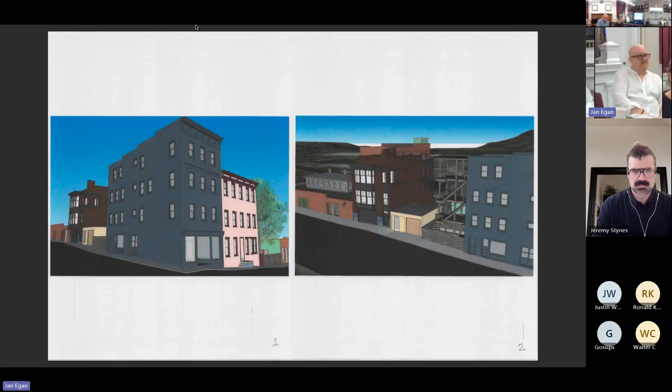Okay, if you could, Jan, Ronald's ready, raising his hand, thank you. If you could start with the site, the urban plan. Okay, let's see, hold one second Chip. Sure. I have a hand raised, Mr. Kopnicki.

I'm sorry, I raised my hand because I intend to speak later. However, what I want to say is if there are people in the room from the neighborhood who want to speak on this, I would defer to them first. I will lower my hand temporarily, but I wanted you to know that I do intend to speak. Jan, I think we should take those comments later, after Chip has made his presentation.

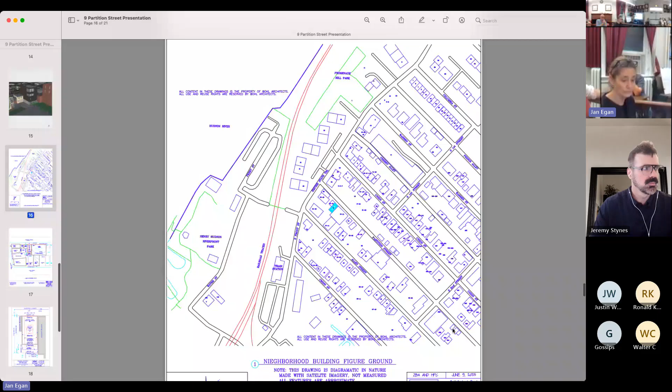Yes, thank you all again for reviewing this application for a new house on Partition Street, at number 9 Partition Street. Thank you for that split screen. This map illustrates the footprint of the lot at 9 Partition relative to the houses and buildings that exist in this immediate neighborhood. This is Warren Street, this is number 11 Warren Street, which we're familiar with. This is the former public school on Partition Street and Allen Street. Just to give you a point of reference, this is Front Street.

This lot is adjacent to a large brick warehouse building, which fronts on Allen Street and is built all the way through Partition Street. Just to give you some orientation to the location of this lot in the city, that's what this building density study is for.

This illustrates in greater detail the site plan. This is Partition Street, Front Street, Allen Street. This is a drawing constructed off of the professional survey that was made of the lot.

In red, we see the outline of the existing building to be removed, which is a 1-story garage off of Partition Street. Adjacent to it is 10 Allen Street, which is actually the number 8 and number 14 lots on Allen Street. This is a 4-story building, nearly 50 feet high off of Allen Street. This is the 1-story building off of Partition Street, which is brick.

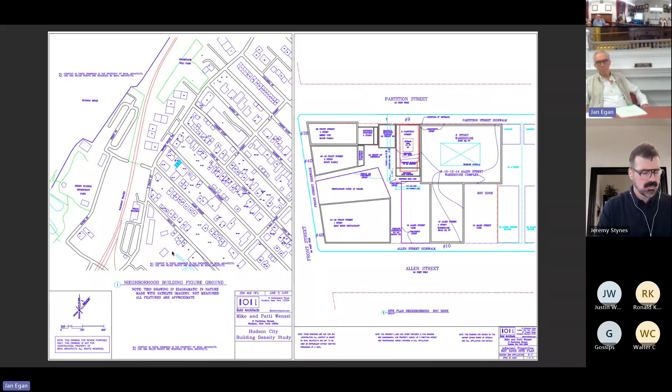This building is on a T-shaped lot. It has a garage here and a private driveway to Allen Street on this side. So this property, which fronts onto Front Street, comes through and owns this alley and the adjacent garage. This is the Half Moon and its patio.

You could advance to the next.

This is a larger detail of the site plan. In red dashed line is actually the property line, and the adjacent property lines on Partition Street. This is the offset that is in that alleyway of the adjacent property. This red dotted line is the existing garage to be removed.

This building, the proposed building, has a footprint which comes with the side yard. Side property line here, the side property line here. We're providing a 5-foot deep rear yard with open porches that extend for the full height of the building.

The rear wall of the building is here. The rear wall of the existing building is here. The front wall of the existing building is 9 inches off of the side of the Partition Street property line.

Just to briefly follow up on the Zoning Board of Appeals approval which we received, this simply indicates the zoning requirement for the setback of 15 feet from the front, 30 and 7.5 feet on each side. We received approval to build in this footprint. We received relief on the rear yard and the 2 side yards.

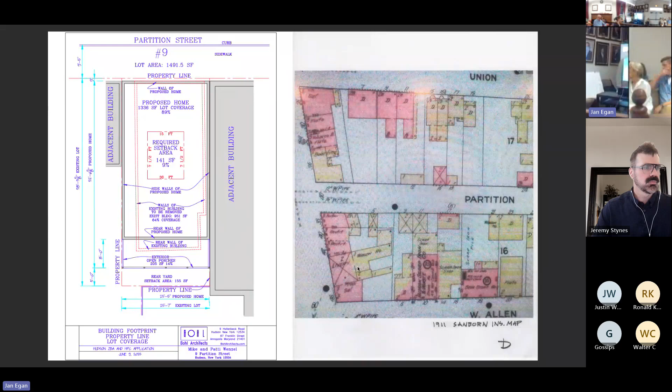This is a scrapyard, iron scrapyard, a livery, and so forth. The reason it's a more intense zoning today is because at one time it was more part of the rest of the industrial area that was all along Front Street and extending down to the train station and so forth.

This is... go back. Yeah, actually I'd like to go to the map quickly.

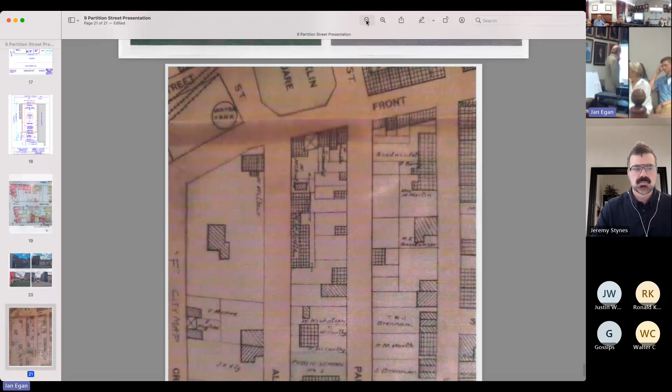This is an interesting map because it's a city map of lot ownership. It illustrates how many of the lots between Partition and Allen and between Partition and Union had been subdivided at one time. Some lots faced Partition and didn't extend all the way through from Allen to Partition or from Partition to Union Street. It's curious that in this zone there was some division of these lots for buildings that faced exclusively these streets and Partition Street.

The other thing that's interesting about this, there's been discussion about Partition Street and its role as an alley compared to the other alleys. Partition Street is 40 feet wide, property line to property line. Allen Street and Union Street are 50 feet wide, just another 10 feet. Front Street is 65 feet wide. The alleys, Prison and Church, Cherry, are 20 feet wide.

So Partition is a unique street. It is in fact a street. Some historians have made the statement that it's one of the oldest streets laid out in the city. These photographs simply show the existing condition.

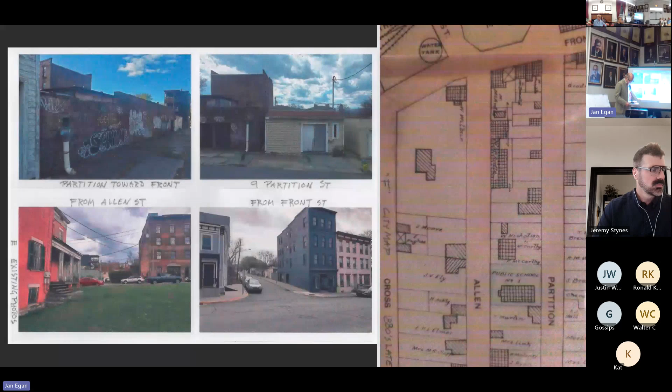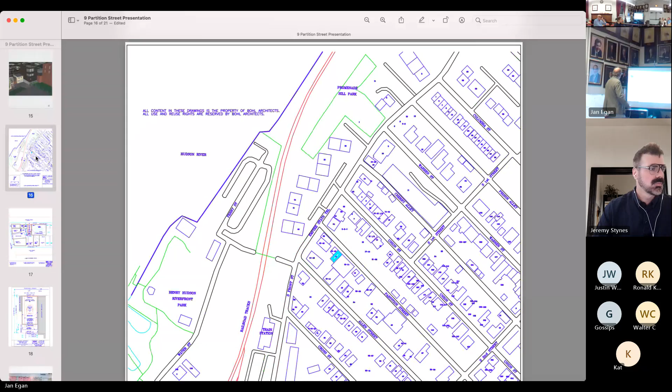We could go to the... what's next on our... could we go to... do we have the architectural drawings in this set? I don't believe so. Okay, then I'll just quickly... let me see if I can. I have the architectural images. Is that what you'd like to see? I have A through F. No, I'm sorry, I'm looking for the architectural drawings. They may not be included in that package.

Okay, these are the architectural drawings that have been submitted for the building permit. We've reviewed this with the code enforcement officer. Full architectural plans are part of the package here, including the garage plan, the first and second floor plans, the roof plan, window schedule, and the building elevations. This is an interesting drawing.

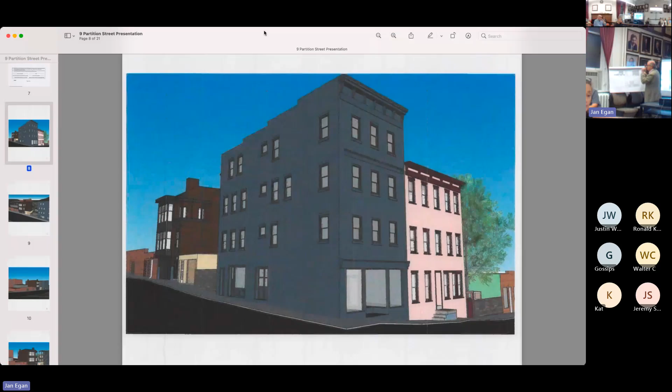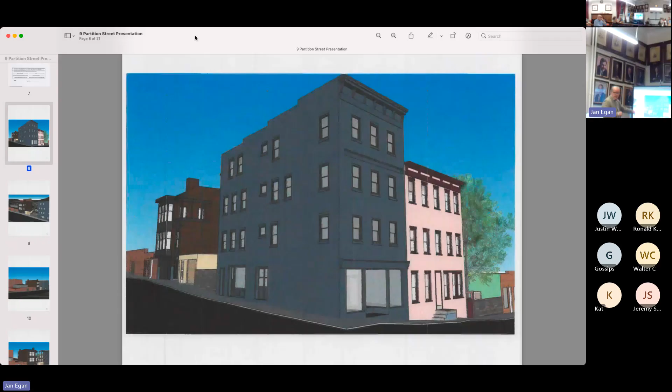We could now go to the images. This is the perspective, viewed from the corner of Front Street and Partition. This is the existing TKG building, which is four stories high, multi-use, office and residential.

This is multifamily, with the Half Moon beyond. This is the small garage and brick building beyond on Allen Street.

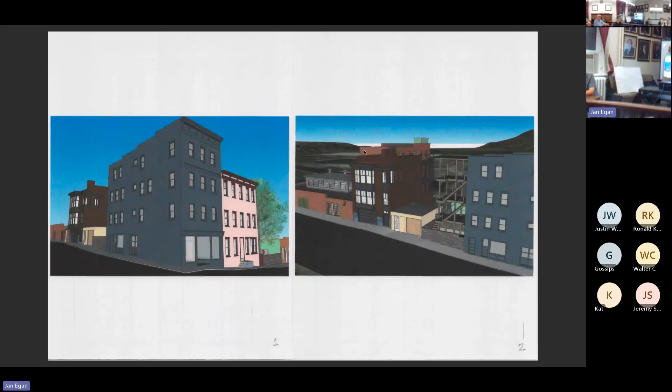This is the proposed building, which we see as we come around and turn around, with Allen Street in the background.

The porches in the back of the TKG building, and this is the brick building that is the back of the warehouse building.

The proposed building includes a garage for parking space, an obvious front door at the street, and centered above the front door are windows on the second floor, with a porch at the third floor level.

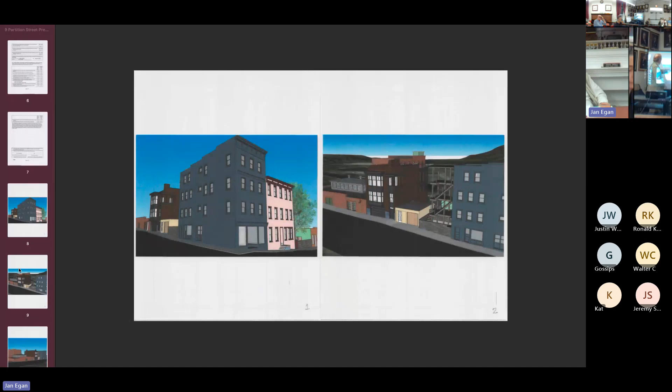At the rear, this footprint, which we looked at previously, the simple footprint of the building is eroded away as it goes up the building, on both this northwest corner...

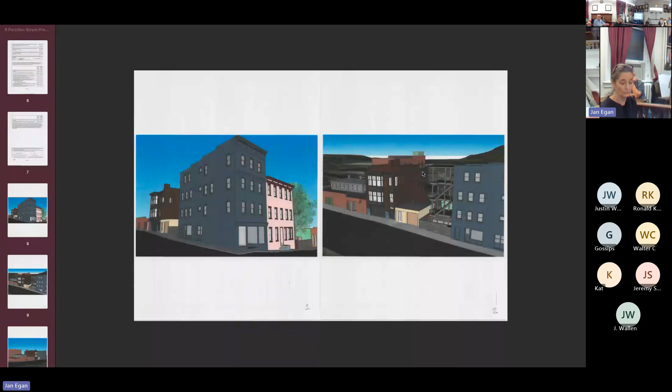...and also the west, south, and east of the rear. So these porches provide some relief from just a simple rectangular box that gets extruded up out of the property line. Next, please.

This is a closer detail of that image we were just looking at. These drawings, by the way, are constructed from measured drawings of the TKG building and measured drawings of the warehouse building.

They are digitally accurate, so the proportions of these spaces and the proportions of this building are accurate and measured. They're not approximations. They're accurate.

This— oh, I'm sorry. That's okay.

The number 9 is painted on the transom above the door—again, another feature familiar to Hudson.

The overall architectural concept here is that this building has a design which transitions from the fine homes of Warren Street and Union Street and Upper Allen Street as it transitions down to the industrial area around the train station and beyond.

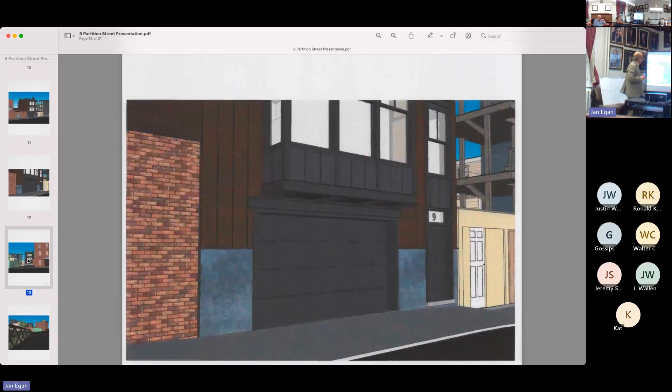...and the industrial aspect of the adjacent building that is on Allen Street. This is as viewed from Allen Street.

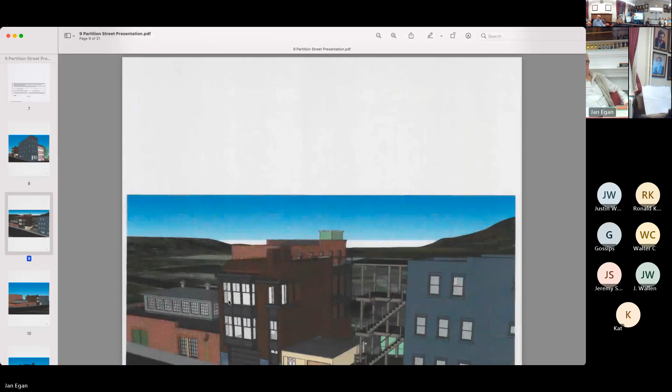The two items that were requested at the last meeting for an additional image - I only have three copies of this. This first image, page 2, is a building directly behind us.

It was asked at the last meeting that we bring an image of the steel siding material. This is the building in black. It's actually very nicely tailored. It was recently done, approved by this commission. It's right behind us on the alley. This siding is exactly the same material, that is correct.

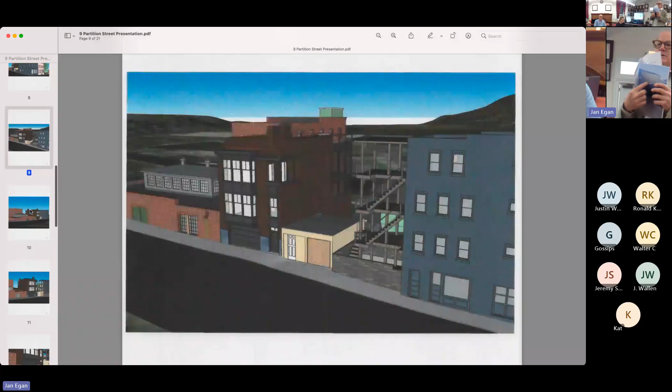The spacing of the ribs we would like to reduce from this width. These ribs are about 18 inches. We have this drawn right now at about 12 inches, so a little bit thinner, not quite as boxy and as heavy as this.

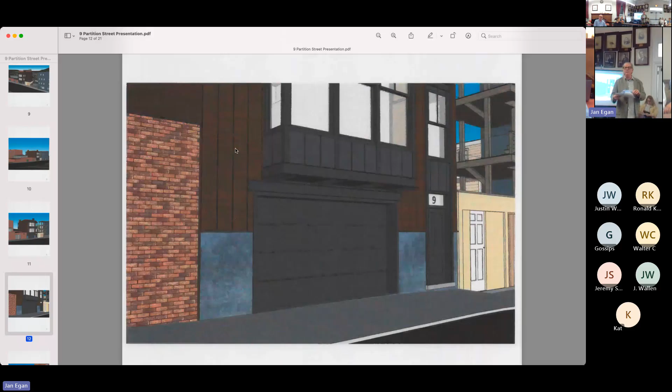It's an accessory dwelling. I don't really remember, it's on this facade facing Prison Alley, right behind us. So I thought this was a very good immediate example of the design intent that we have here. It's 522.

I brought at the last meeting, and still have if you'd like to see them, the brown color sample and the black color sample for the metal.

It was also asked at the last meeting that we specify the windows. We have familiarity with Marvin Ultimate Windows, which is an aluminum clad exterior window with a wood frame interior. We also have Marvin Modern, which is fiberglass, both inside and out. It's black and has a much thinner profile, which is more desirable for us.

We have two other manufacturers of all metal windows. One is all aluminum and one is all steel. The Weather Shield is an all aluminum product, aluminum outside and inside. It has a thermal break and performs to the requirements of the energy code. And then we also have Quantum Steel, another window manufacturer that makes exclusively steel.

There are several other window manufacturers of steel. Are you proposing all 4? I'm proposing that we have an approval for a type of window, not a specific manufacturer.

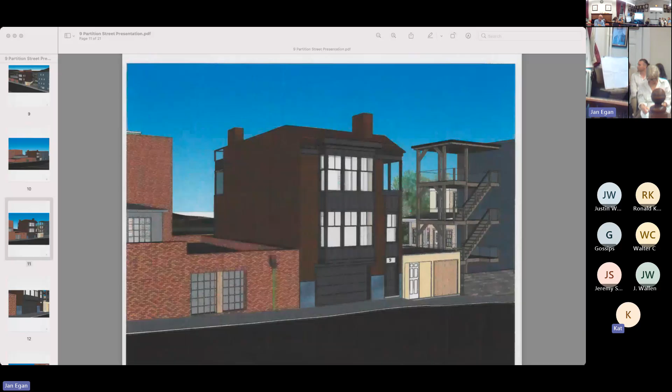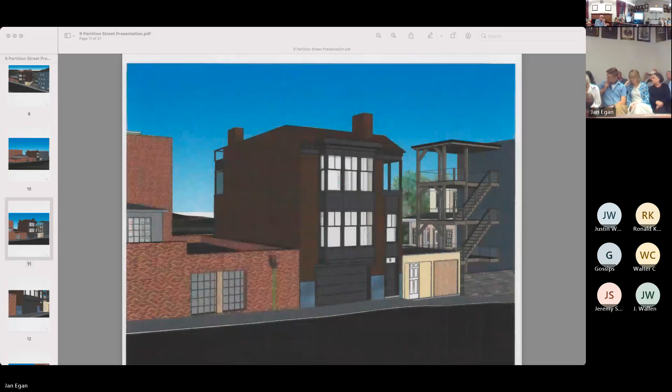So everything is 2.5 stories or lower. That half story you're saying is bad language, it's significant in the mass, light and view blockage and everything else happening on Partition. So it's not a bad term for it. 2.5 stories is a big difference from 3, and it makes that big, large volume blocking space on Partition that's not appropriate for the consistency of the entire street.

So looking at that 3-story building as it's designed adjacent to the TKG building, and the TKG building faces Front Street, I understand that. We don't need to extend all the way on Partition just because of the TKG street building. I get that, but in the context of this zone, the 35-foot height, and the fact that if this were a multifamily building, it could be built to 45 feet, just as the TKG building is.

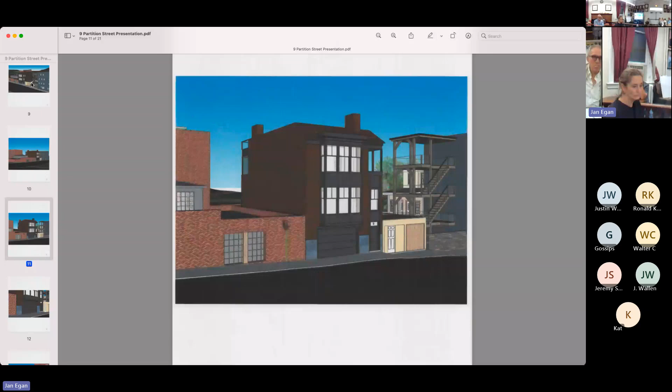The warehouse building on Allen Street - not actually, I beg your pardon - it's not, it exceeds 45 feet. It's 49 feet.

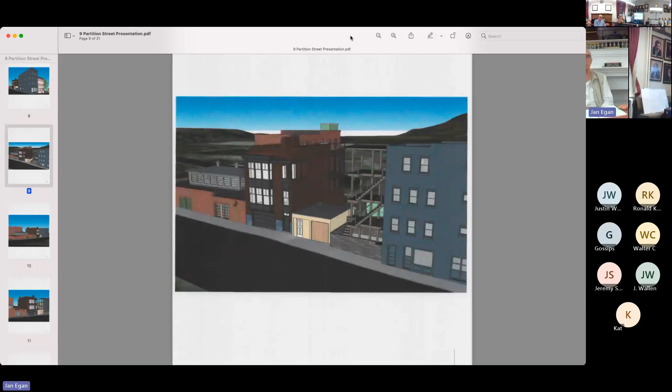So yes, I get that you're fine tuning the use of single-family dwelling versus building mass and building volume. I get that. But in this case, the specifics of this location and the specifics of the context in which this building exists...

It is perfectly appropriate to have a 35-foot high building here. I'm not disputing 35 feet high, but I am disputing the extra variance that you glossed over, having another half-story relief from zoning. Well, please, the overall volume is too big for the space. Anything 2.5 stories, we've solved that.

That's, I realize. Well, it should go to the board, not to me. They shouldn't have. Thank you.

We have to just, I want to hear from the public, and then we'll go to the board. I think the point is that the comments can be made, they're made to the board. It's not really intended to be a dialogue. So while that's helpful, however, our attorney reminds us that that's the nature of the public hearing.

Other folks, speak out. I just wanted to say, I only have one copy. These are the only other single-family homes on Partition with addresses between First and Front, and you can see their scale. I also sent this to you with my letter. I live at 11 Union, directly across the alley.

Could you identify yourself? My name's Alexandria Darrow. I just wanted to have this, people can take a look. This is Stan and I live at 11 Union. I'm not an architect, so these are not CAD professional, but I did my best to do the scale of what we'll be dealing with outside of our house.

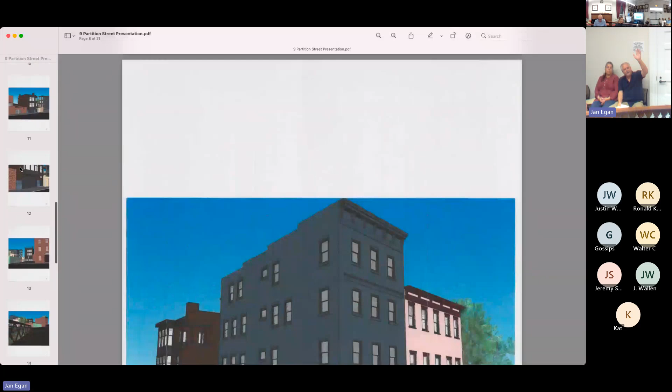And I feel the same way if you look at 10 Allen. I mean, that's a warehouse that was probably built when the South Bay was still there and people were bringing things into it. And now, I mean, it's a beautiful building. Light reflects off of it. The birds all live on it, and it's there. It's a lot of work, but it doesn't look anything at all like what he's talking about building.

And it's not a residence. Either one of these are residences. They're both commercial buildings and multifamily buildings. This is a single family dwelling. So I don't see how those 2 buildings really have that much to do with it.

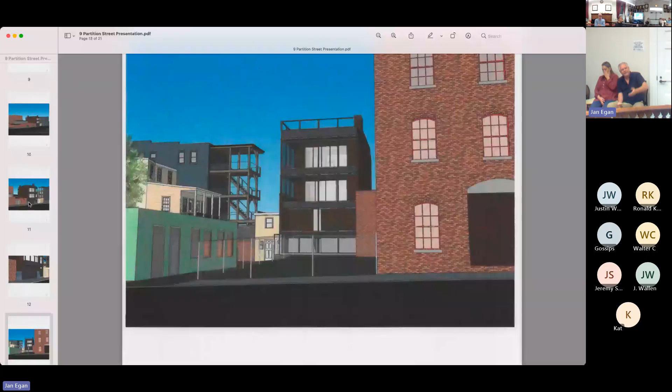And as you go down Partition, there are only, from front to court, only 2 residences listed in the records that I took from the Union Allen South Front Historical District application that formed - when it was formed, it lists every building in there - and there are only 2 buildings listed as residential buildings, and that's 2527 and 219, 221. Both of those are 2-bedroom or 2-story buildings, built a long time ago. One looks like nobody even lived there, so I'm not sure if they do.

He brought up the other day that the partition is 40 feet wide. I don't know where he measured it from. If I measured from my property line to the curb in front of 9 Union, it's 23 feet, so I don't know where the 40 comes from. And it's got a 9-foot sidewalk over there. On that street there are always cars parked on the north side, because we have no alternate side parking since the street's like an alley. So there's another 7 feet that comes out, making that a really narrow street as it is. But it's not 40 feet wide, that's for sure.

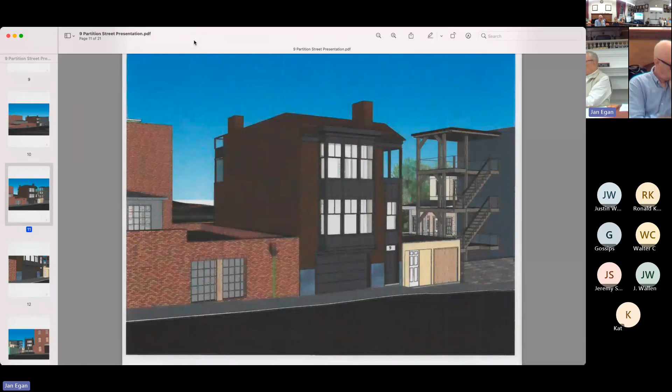Hi, Margaret. Yeah, Margaret Morris, First Ward resident, also council member.

Basically, outdoor rooftop space from a privacy perspective, I think that will create a problem for the residents that this house overlooks. I myself live next door to Spark, which has a rooftop, and I didn't appreciate until it opened how much of a privacy issue that was going to be for my yard, my home, and my bedroom. So please give careful thought. There was no height or zoning waiver required; the project was reduced in scale and size for that. However, that rooftop piece, I think, will have a negative impact on the residents that are over by this building.

Thank you. Someone else in the back? Me? Yes. Hi, Ivy Dane, 15 Union Street.

One thing I wanted to point out straight up was, we appreciate you guys preserving the historic nature. You recently made a decision on 105 Union, halfway up the block from 9 Partition Street. If I can quote John, or Jules, on the integrity of our historic district, massive and inappropriate to the surrounding area — this is a perfect example of that. You guys also approved the Mark McDonald House, a totally different situation. Can't wait to go see it tonight. Different part of the neighborhood, different situation entirely — owner, architect, everything about it. Chip described this himself just now as a rectangular box.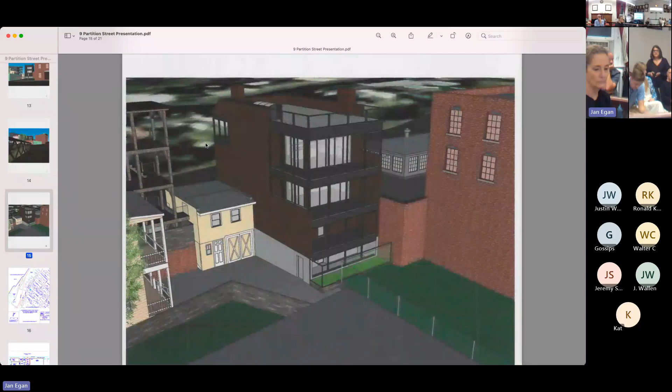You guys can see that also in my letter, sorry, I keep speaking. Yeah, what else can I tell you? Oh, environmental.

There's a wind tunnel that exists off the river, I believe. You guys can see it in my letter. There have been two giant trees that have lost humongous limbs that have come down. One right across from 9 Partition Street came down to 2 Partition, took down the power line and destroyed property. One that came formerly from 11 Union cut across two yards. Between 11 and 15 there's a space, a side yard, that looking at this house doesn't indicate.

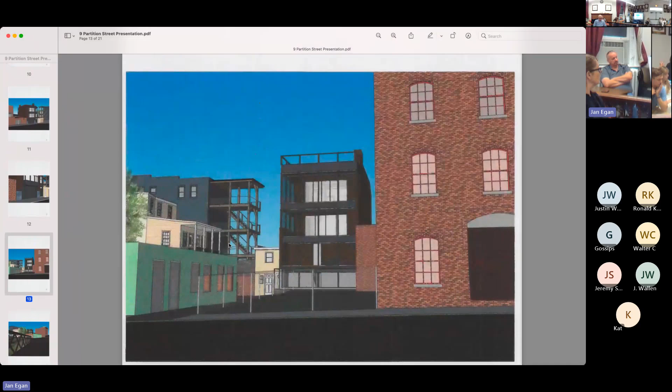I believe this building should be referred to as a garage. I don't know how you could get a car through that pedestrian door that's in that building right now. And the wind tunnel is only gonna get worse. There's already a tiny little garage between these two buildings, and it's only gonna make it worse.

Thank you. Anyone else? Go ahead. Hi, I'm Nicole Vidor, 39 Allen Street.

This is the first I've learned that I'm gonna walk down Allen Street and see a chain link fence. I don't understand that. That's appalling to me. I don't understand why there's any connection between industrial and residential. This is a residential building, not an industrial building. So there's no need to copy industrial.

And I think it's really extraordinary, honestly, that people who come into Hudson have zero regard for their neighbors or the community. I find it extraordinary.

Thank you. Who's got their hand up? Mike? Yes, how you doing? I'm Michael Wenzel. I built property on, when people say come into this neighborhood, I've been around here for a long time.

Built a house on 34 South Front Street, I redid it. It was a knockdown, I made it beautiful. Since I've grown that house, I'm trying to make another beautiful project.

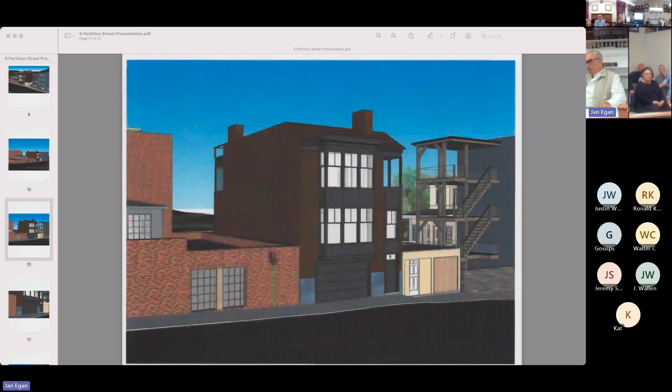The city is currently undergoing a massive democratically led change in how it thinks about public space and how it thinks about organizing itself. I'm sorry, can you just identify yourself? I actually don't legally have to, but thank you for asking, and I politely decline to refer to me as the friendly neighborhood immigrant.

I own property in the first ward, and I really respect how you do your work. My concern, to go back to my point, is the town is in flux. When you see this many residents show up disrespectfully for a landowner, one of the largest property taxpayers in town, I'm deeply concerned at how things are rushed.

I'm not saying you are rushed necessarily, but across the town. And I think, given the public response here, I would rather we extend the process, have some of the very fair questions that were raised today answered in writing, specifically, declaratively, and then make a decision.

Because I've only been in this town for a couple of years, not as long as many of you, and hopefully you sir, but I see a lot of unhappy taxpayers. And my last point is that if you actually look at the tax rolls, which I have done, the first ward carries a very heavy burden.

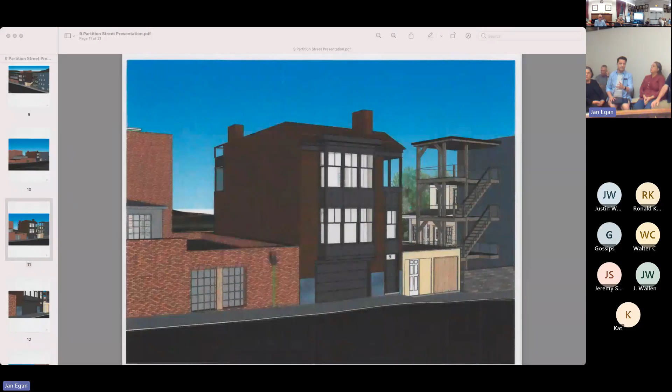For this to happen in the heart of the most historic part of the first ward, I live on Union Street, where I'm also making significant historic investments. I'm deeply concerned. So if we cannot come to an agreement today, which it seems we cannot, I would rather we have, I don't know your process, but in my legal realm, you get very clear declarative responses in writing, and then a back and forth response, and then you make a decision. I would like to request that with any other process.

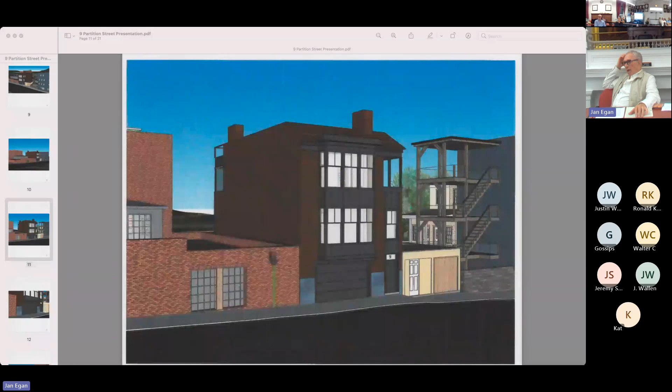Let me comment on the process. I don't think we're either too quick or too slow. We really try to be a deliberative process. We really do try to listen to public views. We also try to respect the owner and the fact that they're putting their money and their heart into a project, and it deserves a certain amount of deference. I doubt that we're going to vote today in terms of process. There's still a lot of input to absorb.

We know Chip, of course, we work together. I happen to know Mike.

They're trying to do something beautiful, but the responsibility is on this board to determine whether it is also appropriate. Everything is predicated on the idea that there is a public interest in what gets built up or torn down, and we're part of moving that public interest in the dialogue. I just want to be sure, and the letters were good about this, that we also continue to be respectful of Mike and Chip for their thinking, their money, their effort on this, and figure out a way forward. That's what we do. We solve problems.

Absolutely. Just let's take a response. You guys do a fantastic job. If you guys could run the city, that would be my preferred outcome.

Just to be clear, I'm not saying your process is bad. I'm just saying, for example, on the technical matter of Nicole's question, residential, commercial, I do not know - I am not from here - if there's some law or if it's a subjective question, whether the commercial aesthetic buildings in the area can be used as a precedent for a residential building. That is really interesting in your question. I do not know the answer. I would love if someone can explain that to me.

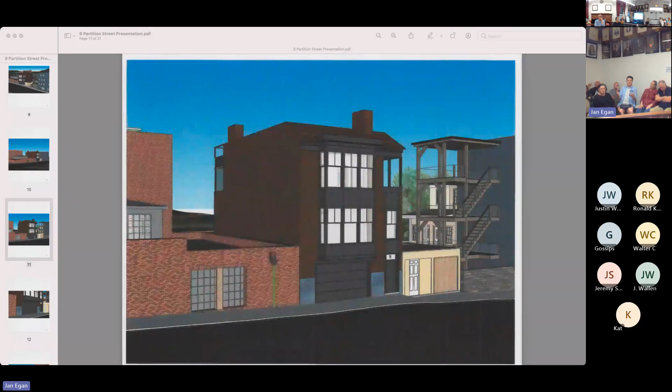And if we need that, actually, I could explain that. Great, I'll give it back to the chair, but that's my question. And thank you so much, you guys are fantastic.

Okay, so what I have - I'll speak for myself, and the board may disagree - I have a lot of problems with this pure notion of precedent. I don't think it works very well in terms of our process. Every block is different, neighborhoods are different, and buildings are different, so we try not to be bound. Chip knows technically what commercial and residential means. I'm not sure that's what we need to focus on. What's the fit with the neighborhood, the buildings around it? Is it appropriate? That's what we do.

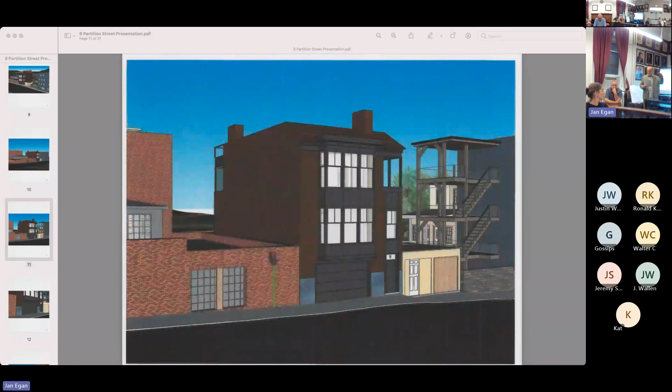I'd like to quickly respond to a couple things that will be helpful. First, the issue of the 2.5-story versus 3-story - that was discussed at the zoning board of appeals, building official. I did not gloss over that as was represented in the zoning board of appeals. The variance was provided between 2.5 stories and 3 stories. The height at 35 feet was not requested to have any relief for that. So the issue of the 2.5-story versus 3-story was attended to by the zoning board of appeals, and a full 3 stories was granted.

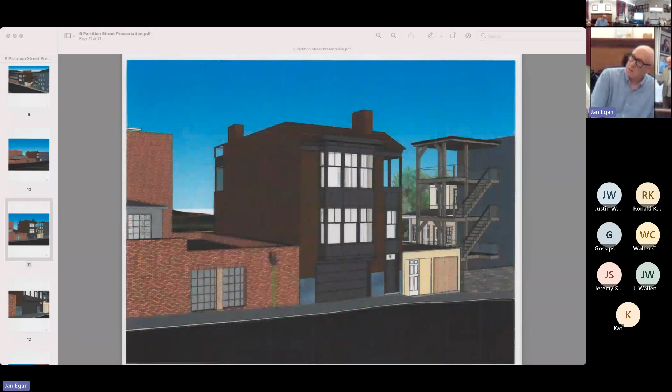The other question regarding the width of Partition Street and not knowing where I got that information - I got it from the 1911 Sanborn map, which is included in your package. Partition Street is 40 feet wide. I did misspeak about Front Street - I think I may have said it's 65 feet, it's actually 60 feet. That is in the package, but Partition Street is 40 feet wide.

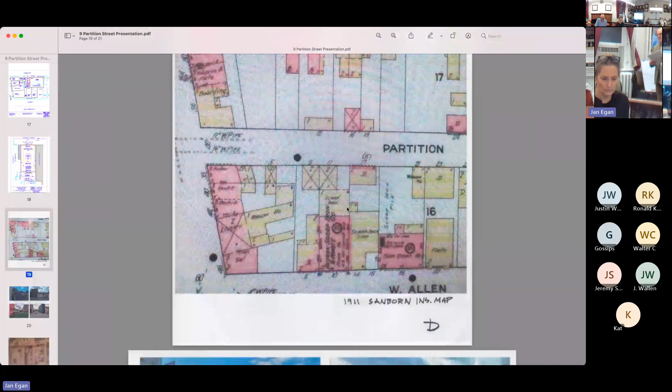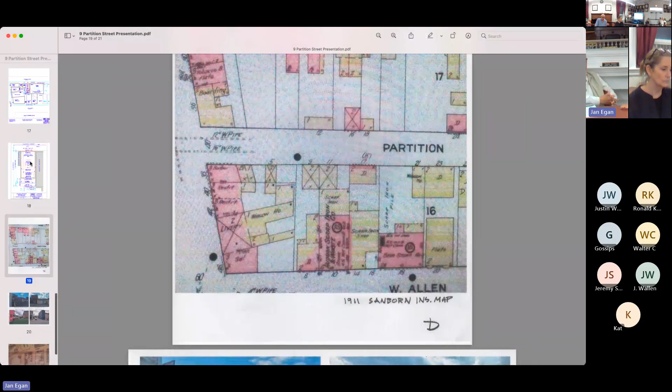Thanks, Jim. Also, the issue of the privacy intrusion into the neighborhood of an upper story, third story, second story porch overlooking yards - that's a real thing, I get that 100%. However, this neighborhood, and in fact Hudson, is filled with 2-story, 3-story porches that overlook backyards. Backyards are not completely private sanctuaries that eliminate neighbors - we share our yards.

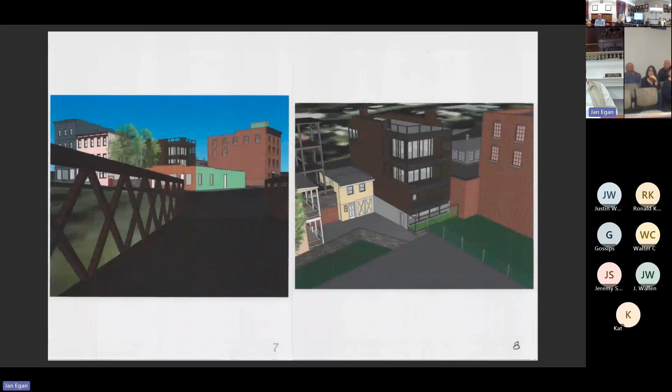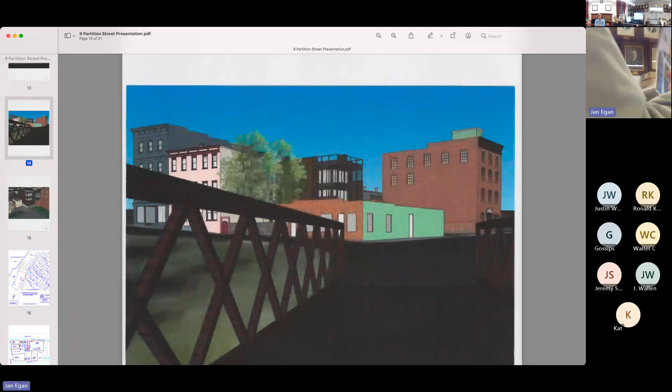So I certainly understand and appreciate the concern about the privacy of a 3rd floor roof deck. However, this particular area has a substantial number of outside covered rooms, if you will - porches that view over adjacent properties. I don't think that...

Mr. Jeffs, we're not going to solve every problem at this public stage. There'll be further discussion later in the meeting. What I'm trying to do is make sure that the folks who haven't spoken get a chance, but without overkill, so we're good. Okay, thank you.

My name's Owen, I live on Union Street.

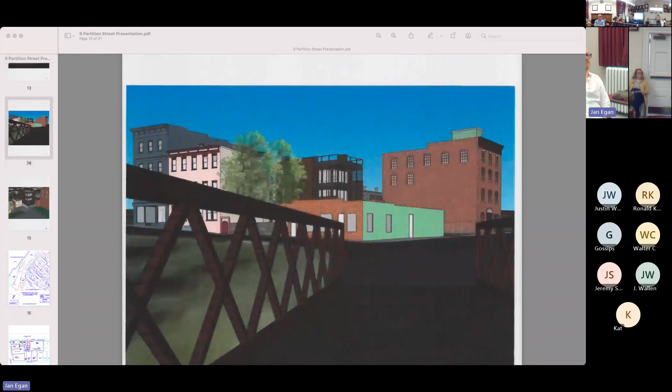I just want to say, just because the zoning board gave relief to something doesn't mean it's appropriate for historic. Just to make that clear from my point of view. The other thing I want to highlight is there are at least 7 houses that will have significant view shed and light impact. They're homeowners who've invested in the front and back of their house, many of them coming before you for various things. They've invested in their landscaping along Partition. Their displeasure with this should matter.

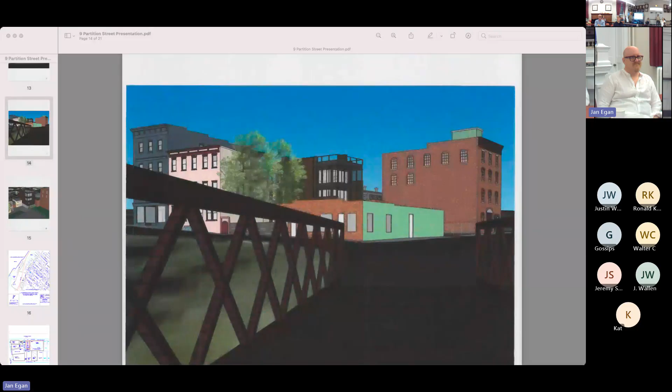That's 7 taxpayers in a row at least along Union Street. I'm sure one of them may have written letters. There's nothing in our process that proposes these concerns don't matter. I understand, I just wanted to highlight them. There's seven houses in a row with significant impact from this. Chairman, thank you.

Someone online who would like to speak? Mr. Kopnicki? Yes. Mr. McGee? Yes, thank you, I'll try to be brief.

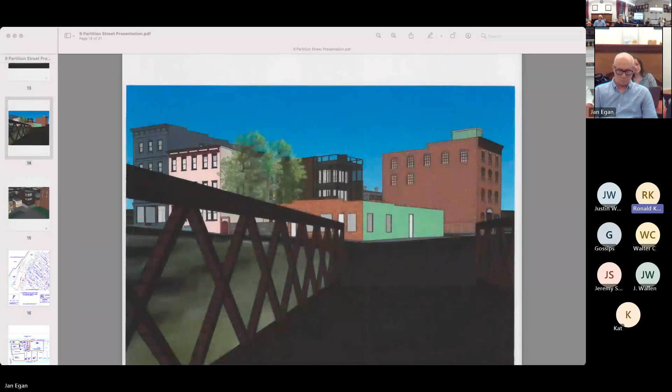I want to comment on the technique of using references or allusions or nods to other buildings or details on other buildings in justification of a particular project. Here, the bay window or oriel is supposed to refer to the finer architecture on Warren Street. Gossips of Rivertown has pointed out that where those features are found, they are mostly found on Warren Street, not on Union or Allen, in the more immediate neighborhood of this building.

Then we have the reference in the materials and the metal cladding to the former industrial waterfront of Hudson. I think if one is concerned with preserving vestiges or traces of the former industrial waterfront, one should be concerned with prioritizing the preservation of what may survive there, rather than intruding what I consider a rather token reference into new construction.

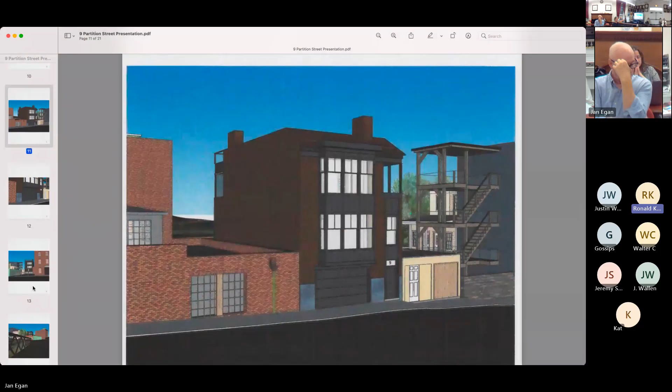At the last meeting on June 13th, I believe Mr. Bowl mentioned the idiosyncratic aspects of this building. I think when it is finally built and we're out of the verbal realm and into the realm of actual materials and massing,

these idiosyncratic impacts will come to the fore, and what the observer coming down the street will be struck by will be those impacts, which are not those which supposedly transition from the finer structures to the formerly industrial waterfront, but which make this building actually idiosyncratic and discordant in its immediate context. It will stand not as an example of transition, but rather as an example of what used to be called the principle of contrast, in which the point was to make the building as distinctive as possible from its immediate surroundings, and in my opinion, excessively discordant and therefore inappropriate.

Thank you. And now Matt will speak.

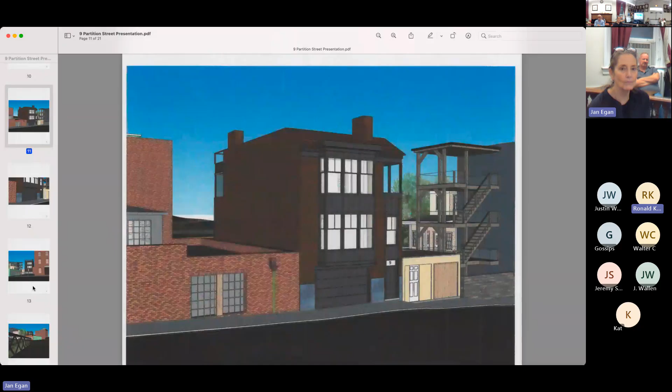Mr. McGee, you guys need to figure out your microphone, we can't hear you. Can you hear me at all now? Yes, could you please speak up? Yeah, did you hear what I had to say? Yes. Okay, my microphone's not muted, so Matt will try now.

Yes, this is Matt McGee. I live on, can you hear me now? Yeah. I live on a 26-foot wide property, and the house does not go from side to side. This is a typical arrangement in Hudson on streets like Allen, Union, and other streets that are not primary, like Warren.

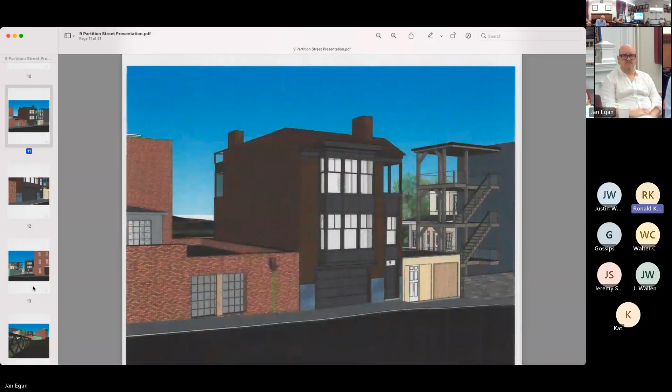The other thing is that presently the building that is there does not touch the warehouse building next door. And there's probably a good reason for that, because I don't think it would be a good place to try to put the two buildings right together. So I don't see how it's going to be sealed up at the side. And I also think it looks better where you can see some of the side wall.

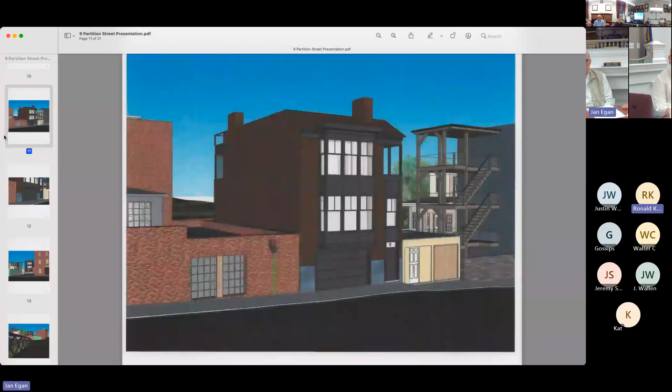This industrial building, which is being spoken of quite a bit, is the only industrial building on Partition. I think it should not be encroached on and possibly built up against in a way that would cause it to have damage. I think it's a very special looking building itself, and I think it should be more respected. There is a distance between the two now, and I think it should be preserved. And I think that any openings between buildings would make it more uniform and compatible with the city. Thank you.

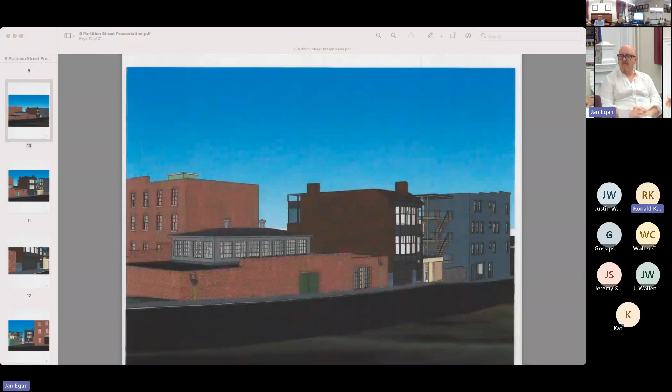Lloyd Olden Getting, third ward resident: This does not impact me personally, other than the well-being and happiness of the community. I am the Republican nominee for the upcoming mayoral election, as well as the Harmony Party nominee, and I am very respectful of this process.

It's dear to me because my mom was so into historic preservation, though I don't know the right word for it. She actually moved an 1850s Methodist church up in Conesville, a few miles, and rebuilt it there. Anyway, respectful of the process, and very pleased with the public reaction, hoping future endeavors comport themselves in such a grand manner.

Just for clarity, to help future applicants with the process: there have been a number of different points brought up. Would each be bullet-pointed and addressed individually, or is it more of an all-or-nothing approach?

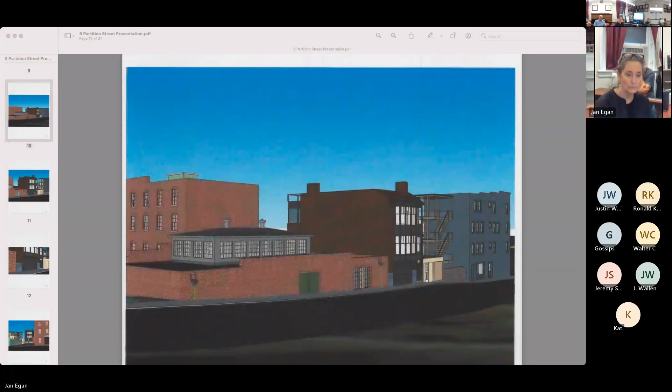No, the project ends up being evaluated at a fair level of specificity. The things that have been raised, to the degree we're able, will be addressed when we come up with a solution and discussed, so it's well established and known. There will be opportunity to talk about scale, fit and finish, materials, details, etcetera - it's not just 'there it is.' I think we'll get to an appropriate level of detail.

Again, so appreciative of the process and the way it's being conducted. Thank you very much - this has been an hour and a bit.

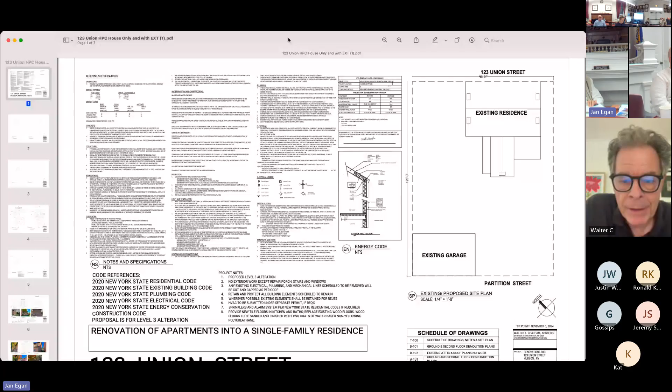Is this the right one? That's the old application - do you have the new application by any chance? I had two files, is it the other file? It's the other file, I apologize. I could probably do it with this if we want to try. Okay, great.

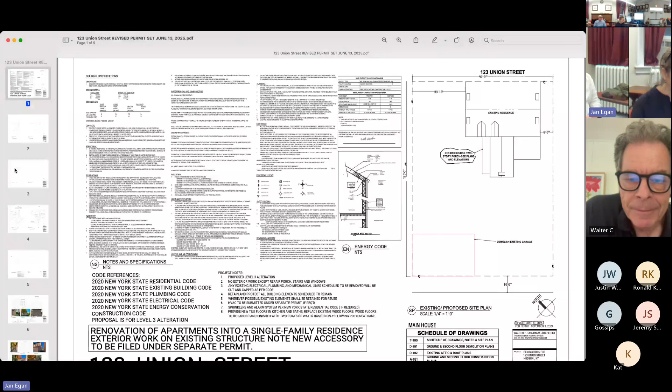That's it, I think that's it. Yeah, okay, so there it is.

As you saw in the last image, we had originally planned to remove the 2 windows in that E1 West Garden elevation and replace them with a total of 4 windows matching the front. That turns out not to be practical for a lot of reasons inside.

So we're hoping just to remove the 2 windows and brick up the openings. We have plenty of light and air in the rooms inside, so we meet code. We would take some of the existing brick on the site and close that up and match it, so you'd just have a blank wall, but a nice one.

The other question is we'd originally requested and received permission to remove the little side porch you see in the photo. On further reflection, we all decided it's a pretty nice porch and it makes sense to keep it, so we'd like to keep it and just restore it.

We'd also keep the door opening shown in the photograph, and everything else would be as before. We'd originally planned to close up 2 openings on the west elevation of the wing with the porch and replace them with windows, and that would stay the same. So the only 2 changes are closing up the 2 openings on the west side and retaining this porch and door.

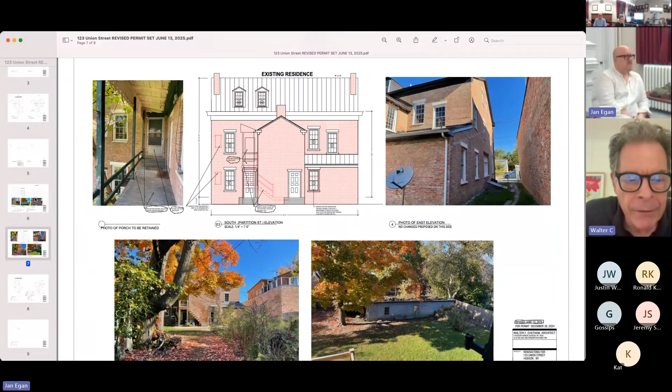Questions? That seems pretty straightforward. We're getting updated drawings to reflect that. These are the updated drawings, yes. Oh, that they're showing? Okay, got it, sorry.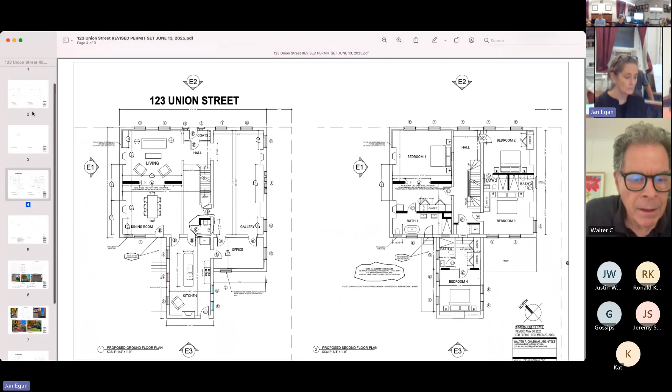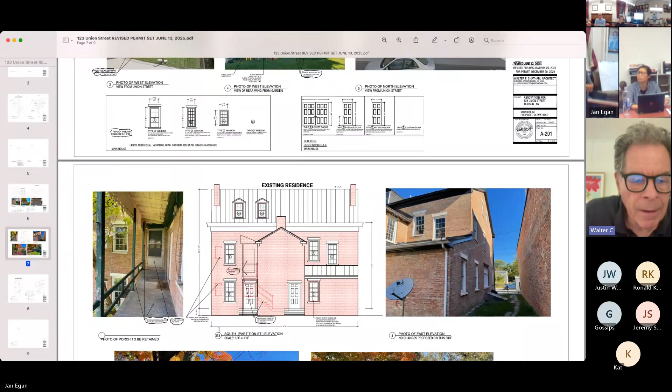Just a question about the porch - are you retaining the same materials that are currently there? That's the current plan, yes. Just keep the porch. I think we'd probably have to add a cable or something to the railing, a very de minimis thing just to make it legal. It's a little short, but I don't think that would even be visible.

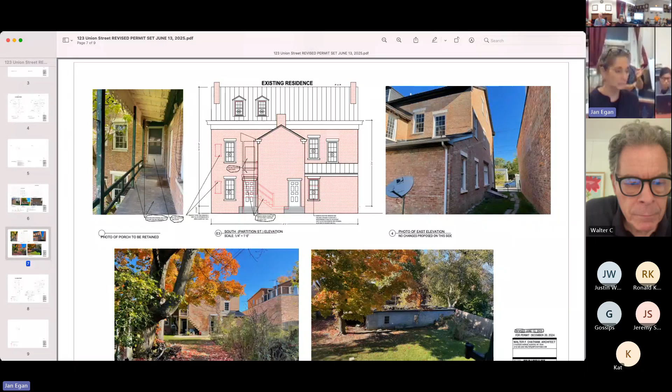I think it's pretty good. We just go back to the reference of the open windows and bricking them in. This is the west garden elevation? Yes, you see the 2 windows we're removing, we would just brick up those openings.

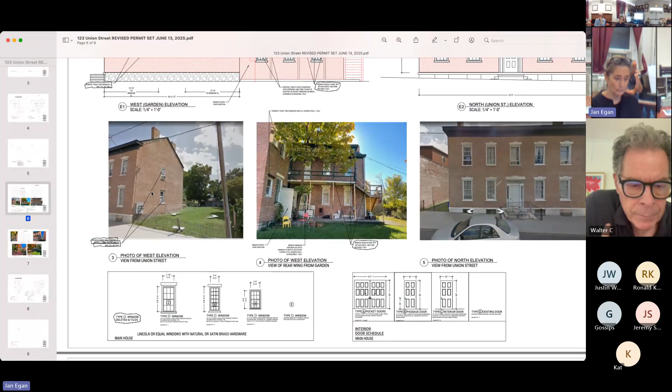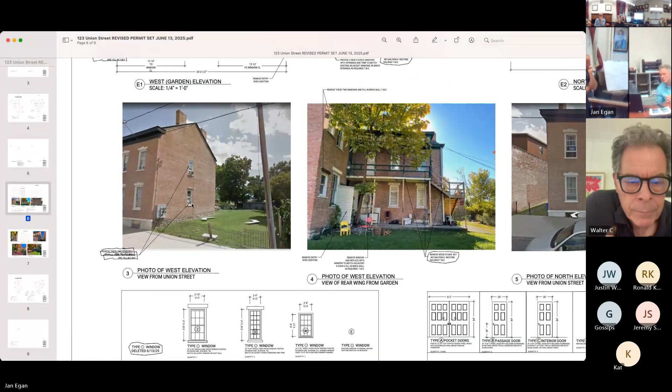Jan, can you enlarge the photograph below that drawing? It shows better what it looks like. These 2? Yeah. This is the garden, and this is the west lawn - those would be the windows. Does that help you? Yeah.

I lost the script, what's the question, Jim? So those are the two windows, okay, that they're talking about eliminating. Did you get to speak?

Yeah, Craig, do you have a question? Walter, can you hear me? Yes. First off, has these changes been submitted to my office? Yes, we sent you an email when we emailed the HPC. When did that happen? 'Cause I don't think I got it. Okay, I apologize Craig, I'll resend it right after the meeting.

Another thing that has to be addressed here is that rail system on that porch in the rear of the property is not compliant to code. So originally you were changing that, so now we need a whole code review on that because you don't have the proper spindles, the proper guards and things to prevent fall protection. So you're gonna have to get more detailed with that as well.

We'll make a note to the commission that those two windows were, by accident, filled in already by the owner's contractor. I found this out a couple days ago, so they have an option - if it doesn't get approved, they have to put it back the way it was. They're on notice as far as an OTR violation that they have to get this corrected before they can move any farther. So Walter, that's why he's here.

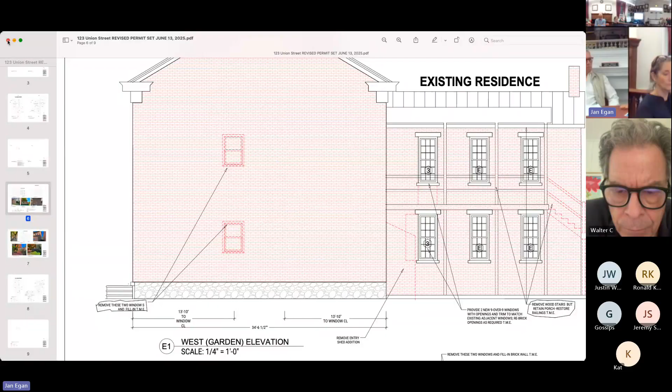Walter, touch base with Craig. I think we're gonna find this application incomplete at this time - it has to go through Craig's review and there are other issues. Correct, so I'll make a motion to find the application complete. Second. And it's gonna fail. All in favor? There it is, it's incomplete, work this out with Craig. Okay, next, thank you, thank you.

Walter, can you please send me the plans before now? I'm sorry, the what? Is it on me? Okay, 119 Warren Street, a sign. Is there someone here to speak for 119? Yes, we have our applicant here in person. This is for a sign.

Longest wait for a sign. Well, I'm with the planning board.

My name is Oliver Servo, my partner is Chef Saigon. I don't know if any of you have tried us yet, if not I would welcome you to our space. Thank you so much for adding us to the agenda, I know it's last minute, so thank you for doing that.

It's a sign that says the restaurant name, you can't see it from here. Oh, I'm so sorry. Yeah, the Wild Kitchen of the World.

So we did put it up a little bit, which I apologize for, and didn't know that we should wait for approval to put it on, but I kept it. That sign did look familiar. So I hope everyone will like it and will get it approved.

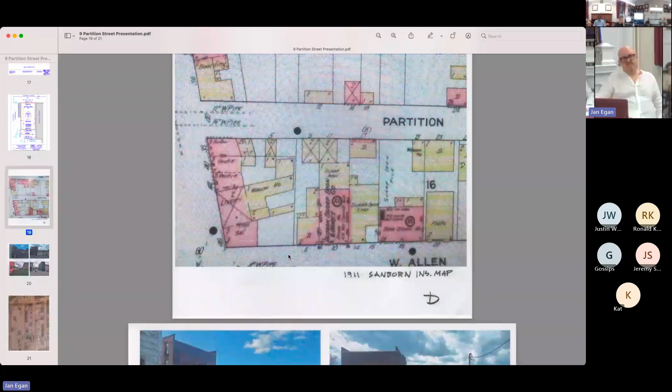It's concrete block and some poured concrete. I think it's typical of early 20th century construction, the building materials used, which can be witnessed from the inside. Some of them have been recycled from other buildings. It is a frame building structurally.

As has been pointed out, it's a very awkward distance to the one-story brick building. As we'll see on site, there's a completely unmanageable space between the existing building and the brick warehouse building. It cannot be accessed. Very awkward and difficult. So, has the warehouse up the hill also been built to the lot line?

Yes, the warehouse addition, if you will. This facade is, I believe, 9 inches back from the property line, although this hasn't been surveyed. We know that this building is 9 inches back from the property line of number 9. That's why we sought relief from the zoning board of appeals so the front of our building would align with this brick building. This building goes all the way from the property line at number 9 to the residential garage upstream of it, at the partition.

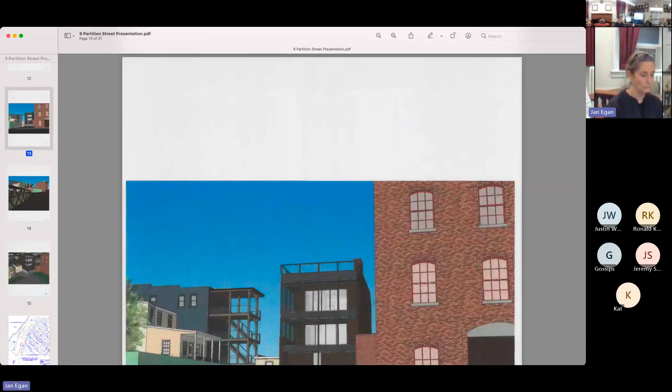Understood. Are the chimneys clad? Are they brick, are they metal, what are they going to be? The chimneys are also metal, the same siding. They provide access for flues from 2 fireplaces on the lower level.

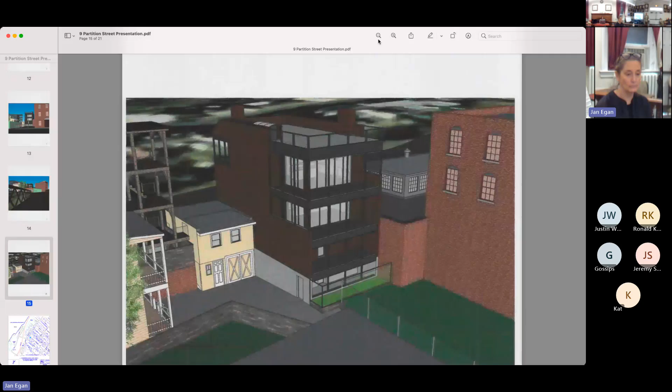This is only modestly relevant. Did you consider brick as a second material? We did consider brick as an element, but felt that because the existing warehouse building is predominantly brick, it would be impossible to match, and wouldn't even be desirable to match. Finding a compatible brick would be difficult, and I don't know if it would be as successful, unless it was a very dark brown brick like you've rendered in the clad. But that's just one opinion.

Lee, could you stay here? I think maybe this is a question for you, Mike. Have you considered - one element of this building is this almost pane of windows in the rear, where you're going to enjoy a view. Have you considered that there's a blank lot in front of you, and that by building this structure you would create a precedent for common structures that look like this, and you might someday be facing into the same exact window?

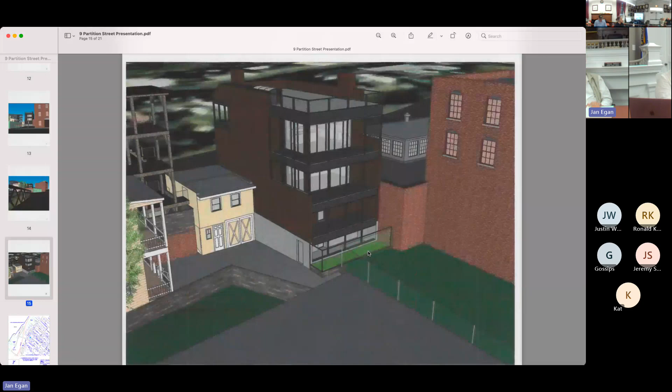That's all I had. Otherwise, I do support a site visit. This has rarely seen this level of public interest, and I thank the public for all their thoughtful commentary. I also thank the applicant for their excellent presentation and thoughtfulness around the design.

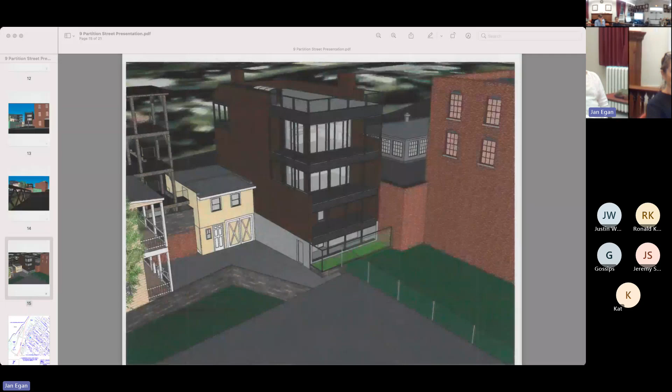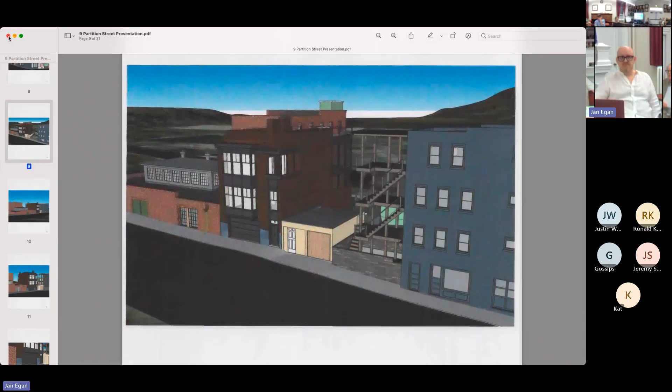And as far as what the building used to be, in 1851 it was lived in - it was a residential business, and the man who lived there built blocks for ships. So it's been there on that side lot, at least since 1851. I don't think it's the same structure, definitely, but that's what was there. Interesting, thank you - blocks and tackle, like wooden blocks for ships, like the blocks and tackle. Yes.

Is there any interest in adjournment? Are we setting a time to reconvene? The site visit is proposed to be 2 weeks from today at 9:30 a.m. Got a motion on that? Yeah, sure - motion, we have a second. John and Hugh, all in favor, and it's done.